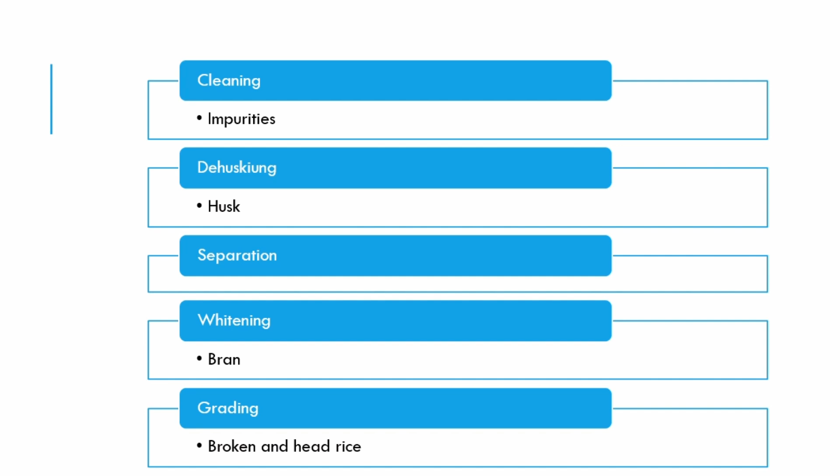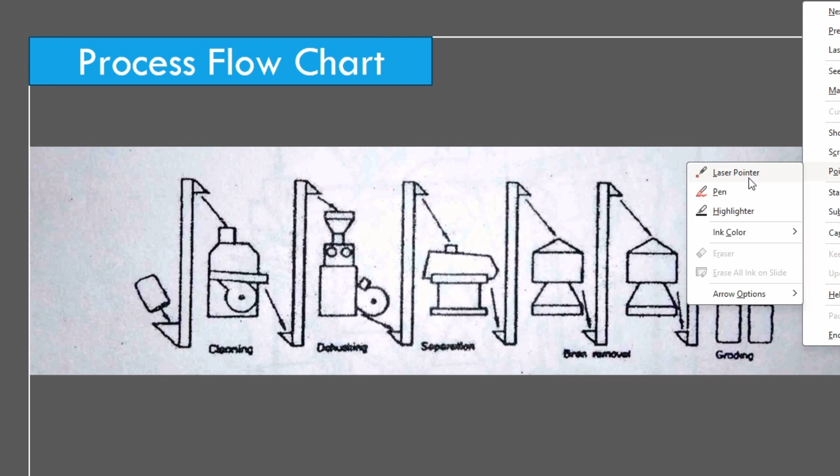Next is the grading. So separate broken from the unbroken rice, and broken are separated into different sizes. So this is the process flow chart you can see from here. So cleaning, dehusking, separation, bran removal and last is the grading. Here we have unbroken and broken rice we collected.

So I have with me a picture of a cleaner where you can see that here we have paddy from the hopper. We feed the paddy into the machine through an opening. The suction fan draws the air through the film of the grain and separates all dust and light impurities.

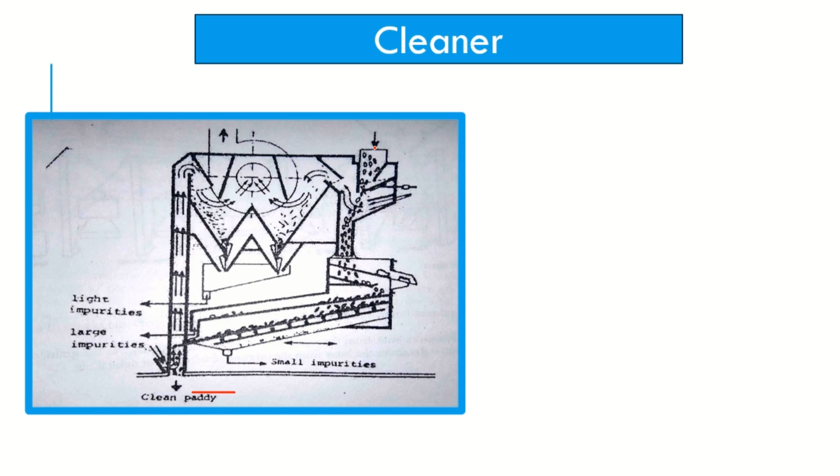Now paddy falls to a vibrating sieve with a large perforation which removes the large impurities such as straw and big stones. The paddy and the remaining small impurities fall to the bottom vibrating sieve with small perforation which removes the small impurities.

This is another picture of a cleaner. From here you can clearly see that we have a hopper, we feed paddy there, and here there is an aspirator. So it rotates and it sucks all the lighter particles outside this way, and here we have the large impurities, and this is an oscillating or vibrating screen where all the cleaned paddy is collected.

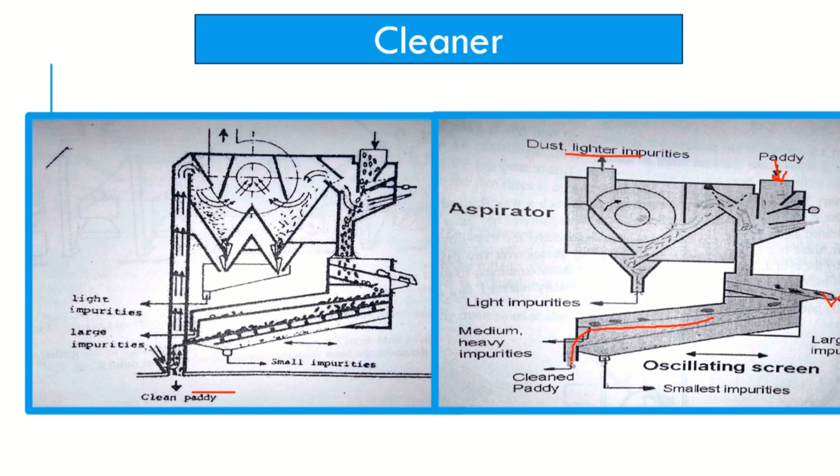Next is the destoner. The destoner consists of a perforated deck mounted at an angle. So here we can see that it is mounted at an angle, and is operated by a reciprocating motion. So a large amount of air is blown from below through the sieve, which stratifies the material according to their density, or you can say heaviness.

So the heavy stones remain on the deck and are carried backward to the top end by the reciprocating motion of the deck. The lighter paddy remains floating and slides down and is discharged from the lower end. The separation can be controlled by adjusting the rate of feed, airflow, or the sieve tilt.

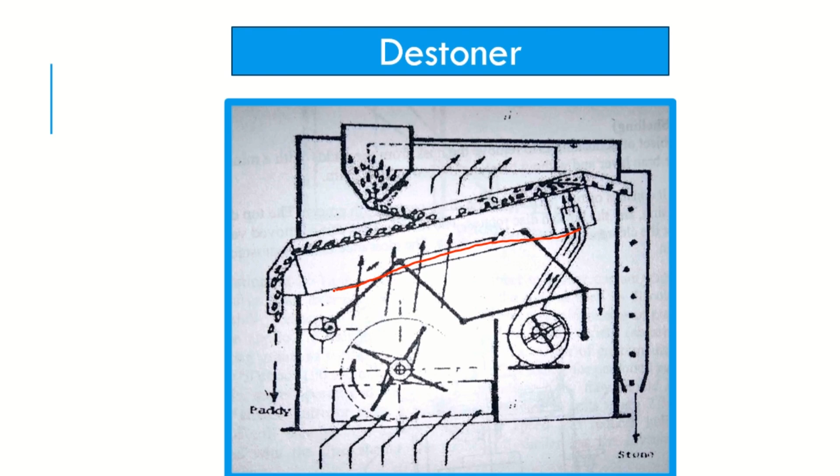Next important process is magnetic separation. So this is done by a magnetic separator. We have two types of separator, A and B. I'll explain. Type A is a permanent magnet located in such a way that when unclean paddy moves across it, the iron particles are collected by it. The particles are later cleaned by hand. So this is manually operated.

Now next, another one is type B, which is completely automatic. So a rotating cylinder is turned by free flowing paddy. Under the cylinder, there is a half round magnet. So here you can see that this is the magnet. Now, as the paddy passes over the cylinder, iron particles are held by the cylinder's magnetic attraction.

As the cylinder continues to rotate, when the cylinder is not over the magnet, the iron is automatically released and discharged separately. So here you can see that there is a scraper type of thing; when the iron particle passes through this particular thing, it scrapes out the iron particle. So this is automatic. In the other case we have to manually remove the iron particles.

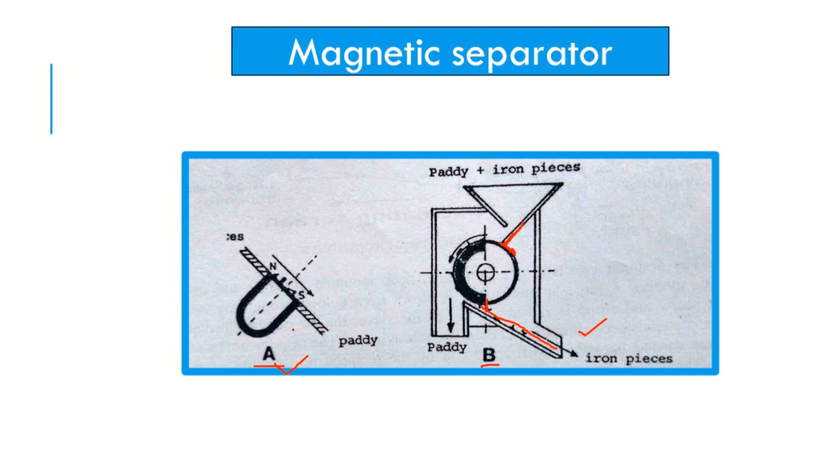Next is the dehusking process. The objective of dehusking is to remove husk from the paddy with a minimum of damage to the bran layer and without breaking the brown rice. So this is the diagram of a disc sheller. It consists of two horizontal iron discs coated with emery.

The top disc is fixed to a frame housing and the bottom disc rotates. The rotating disc can be moved vertically up or down to adjust the clearance between the two discs. The clearance is thus adjusted to the size of the paddy grain. So here the clearance is adjusted accordingly.

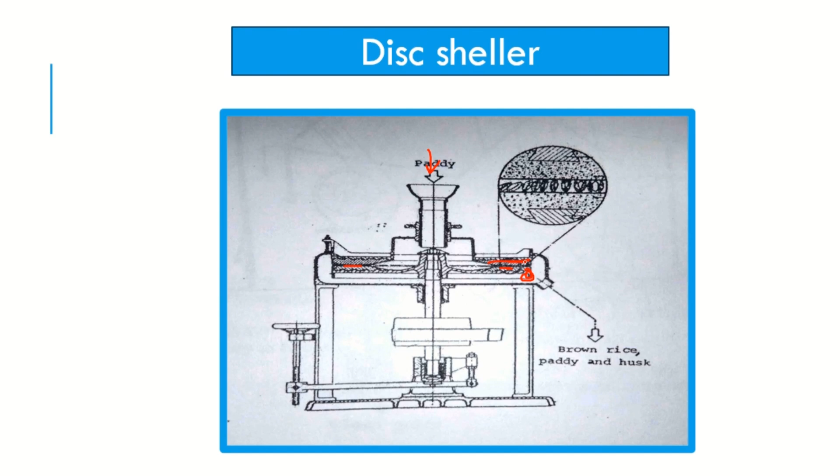So paddy is fed into the center of the machine and it reaches the rotating disc. It moves outward by centrifugal force. Now, during its travel outwards, whenever it is upended, it is caught between the top stationary and bottom rotating disc. So this is the rotating disc and this is the stationary one. So the clearance between the two is critical to avoid excessive breakage.

Next is the rubber roller sheller. So the rubber roller sheller consists of two rubber rollers rotating in opposite directions. So both rolls have the same diameter, but one roll moves about 25% faster than the other. So here you can see that there are two rollers and they are rotating. One is slower and one is comparatively faster than the other.

The difference in the peripheral speed subjects the paddy grains falling between the rolls to a shearing action that strips off the husk. So one roller is fixed in position and the other is adjusted in order to increase or decrease the clearance between the two rolls. The rolls are cooled by blowing air on the roll surface. The shelling or dehusking rate is generally maintained at about 85%.

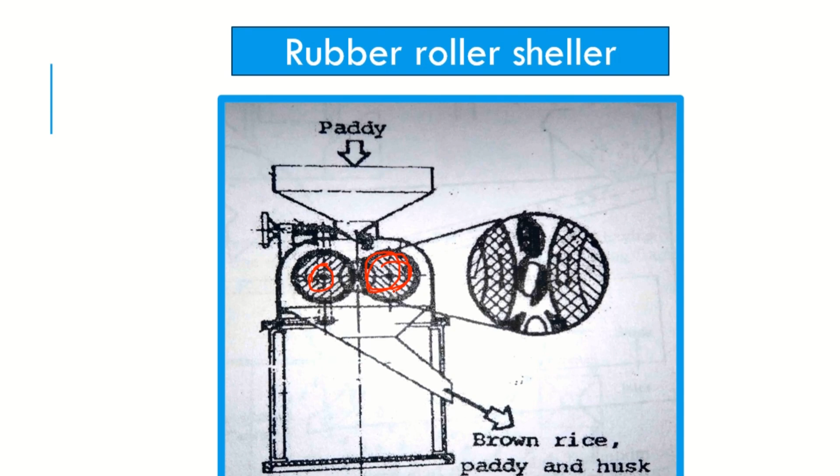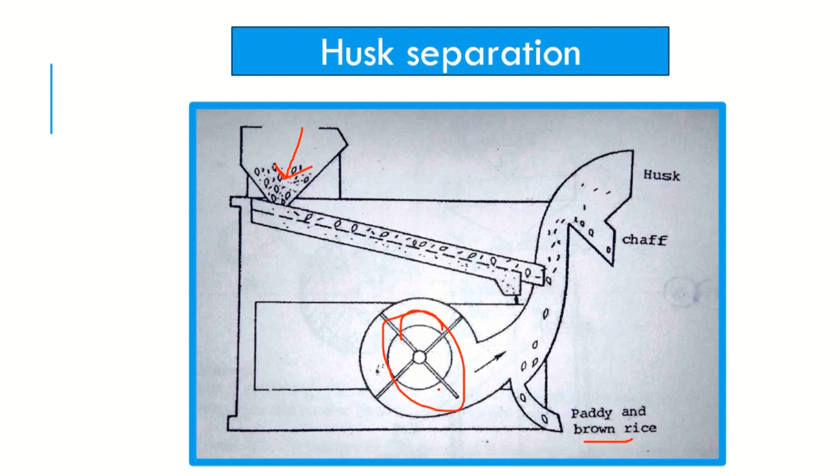Next is the husk separation. Here you can see that the mixture of paddy, brown rice, brokens and husk is fed onto the top. Now, the brokens are passed through the perforations of the sieve. So here you can see that there is a sieve. Now, as the mixture of husk, paddy, and brown rice overflows the sieve, air is blown or sucked through the mixture. So husk is carried away by air, and paddy and brown rice are collected. So air is blown in this particular process and it removes the husk in this way.

Next is the paddy separation. So shelling is never done to a level of 100% to avoid rice breakage. Grains also differ in size, so smaller grains remain unshelled. Therefore, a paddy separator is used to separate the remaining unhusked paddy from the husked brown rice. So here this is the picture of a compartment type separator.

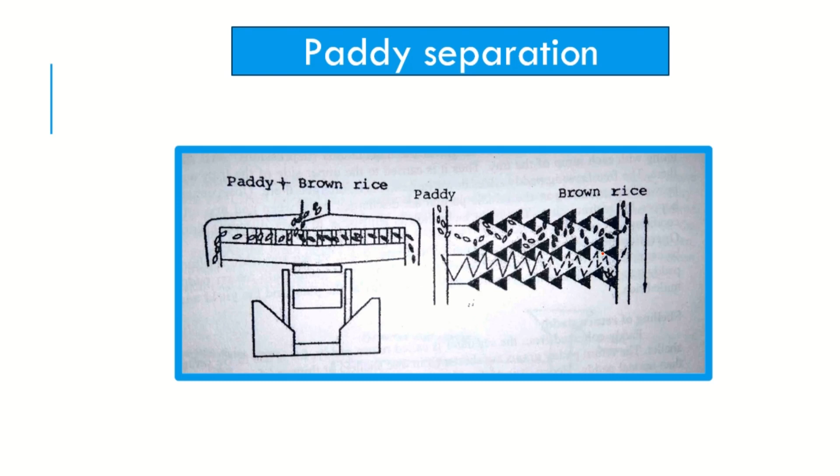The oscillating table is divided into zigzag channels and is inclined from one side to the other. The mixture of paddy and brown rice is fed from the hopper to the center of the channel. The impact of grain on the sides of each channel causes the dehusked brown rice to move up the inclined slope. The unhusked paddy slides down the slope to the lower side of the table. The slope and stroke of the table are adjusted to meet the needs of paddy of different sizes. So paddy separation is done to separate the paddy and the dehusked brown rice.

Next comes the tray separator. So the tray separator consists of several indented trays, that is, trays having a large number of depressions. Okay, so the tray section moves up and forward, making a slight jumping movement. So here the brown rice and paddy are separated. This is at an inclined angle. So here you can see that the brown rice is there and the paddy flows down. So here we can separate these two. The table inclination is adjusted to meet different grain sizes and conditions. So in these indentations, the rice is caught and these two are separated.

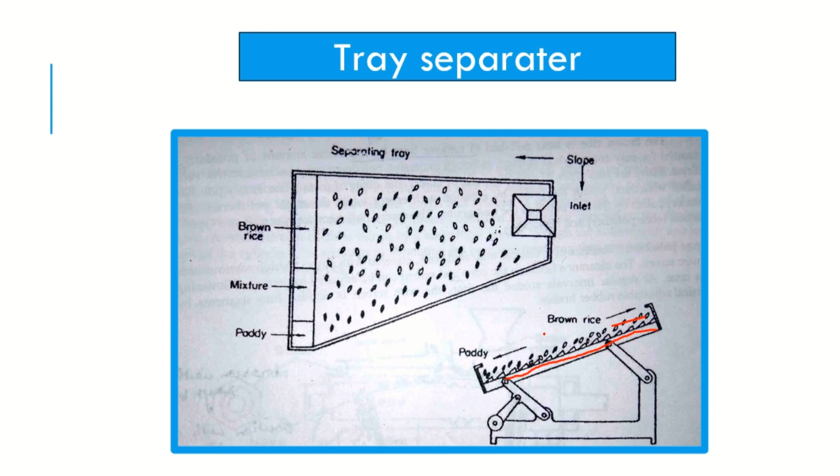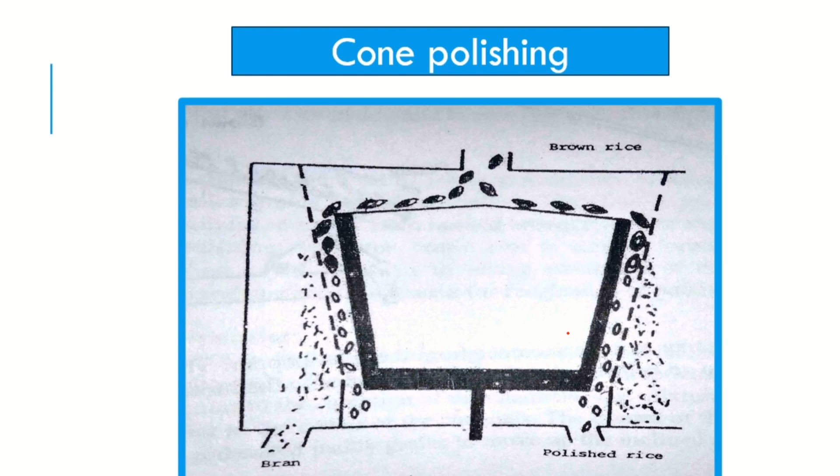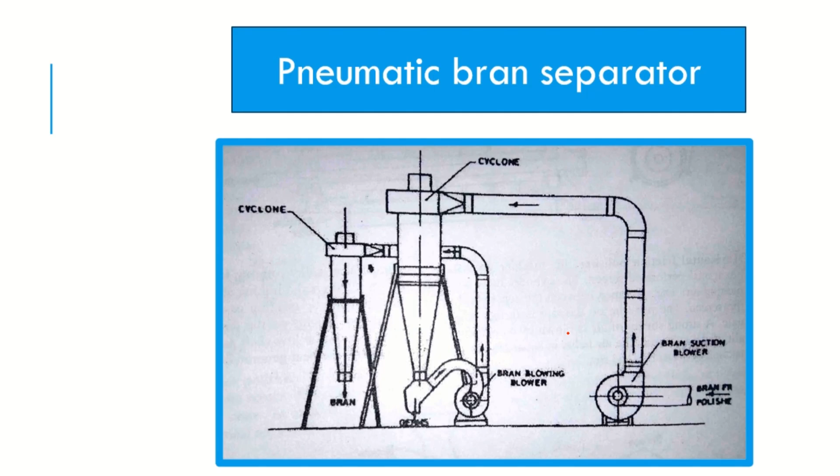Next is cone polishing. So polishing is an important process. The brown rice is next polished to remove the bran layer. Okay. So here is the diagram of a cone polisher. It consists of a vertical cone covered with emery which rotates inside a wire screen. The clearance between the cone and screen can be adjusted by raising or lowering the cone. Other polishers like horizontal abrasive polishers and horizontal friction polishers are also used. After that, pneumatic bran separators are used, where we can remove the bran layer and collect the polished rice. So this is all about the rice milling process.